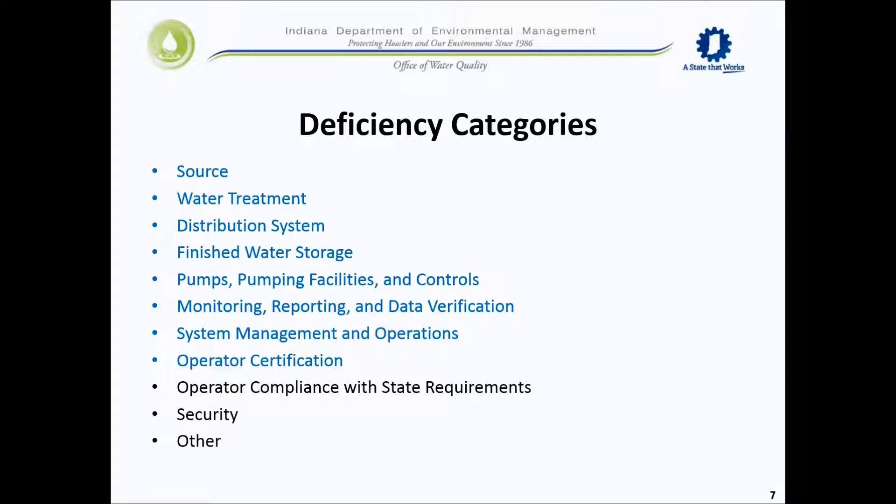So just a little bit of perspective. We are tracking deficiencies—I apologize, these numbers are outdated, I didn't have the right ones here, but these are from April. We keep track of these to help water systems complete upgrades or fix deficiencies. For minor deficiencies, we're up to about 905 across each survey category. For significant deficiencies, we're up to 153 that we're tracking, and we'll be following up with water systems to make sure they correct them.

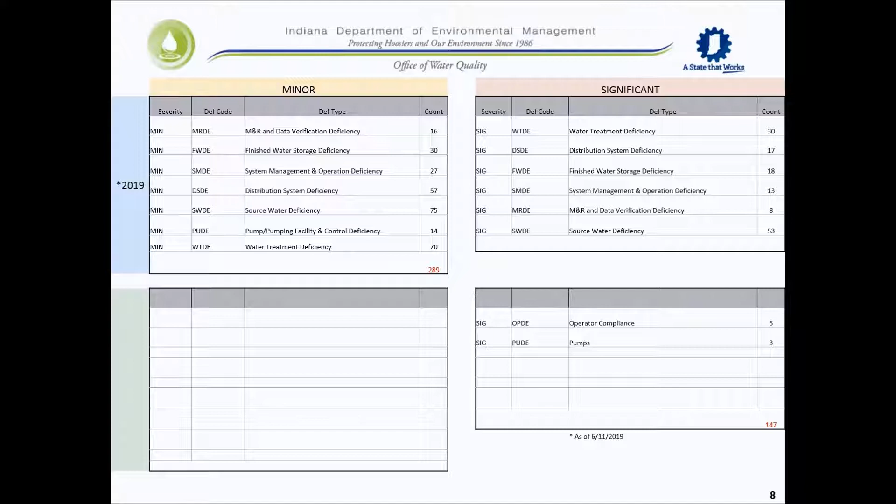Basically, as a field inspector, you're visiting a facility and making contact with the operator, and as you walk up to the well house or pumping facility, you're striking a conversation and developing that rapport. In Indiana, we make appointments to go visit them, but we can just show up if we want. Most of the time we're able to make appointments and meet with the right person, so we're getting the correct information.

In the process, walking up to the pumping facility, we're scoping it out, looking at the roof and different aspects of what we're looking at. We're looking for any problems that might be happening on the outside, any security issues. Once we open the door and look inside, we're surveying the area and beginning our source inspection, looking at each of the components of the pumping facility.

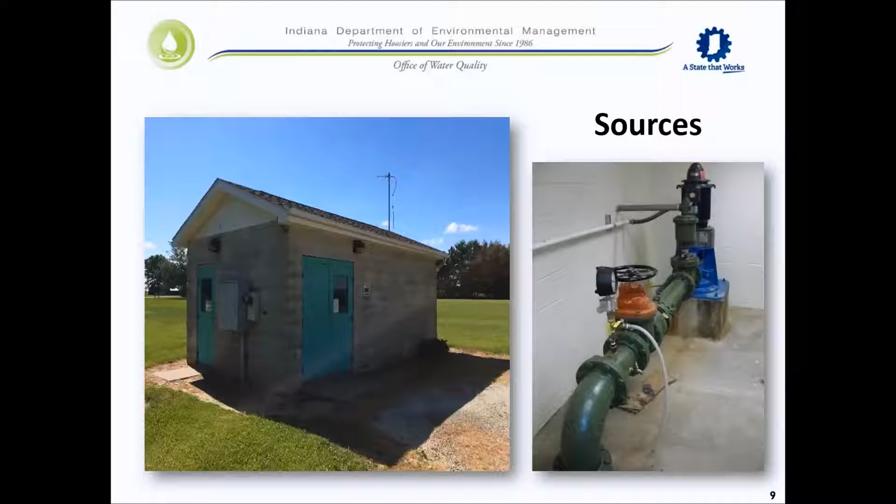This is a small municipal water system. At each of the facilities, we're discussing with the operator any issues they might have had with this well or any others, any of their source water aspects.

As an inspector, you're providing a second set of eyes. Maybe you see something obvious and point it out to the operator, and they realize, oh, I didn't know this was happening. You'd think, boy, this is obvious—you're leaking oil all over the place, how did you not know this? So that's a good opportunity to approach the operator and really drive home the point that you need to be looking at your infrastructure. You need to be visiting these facilities, especially if they're remote, because if you don't have good electronic surveillance, you don't know what's happening out there.

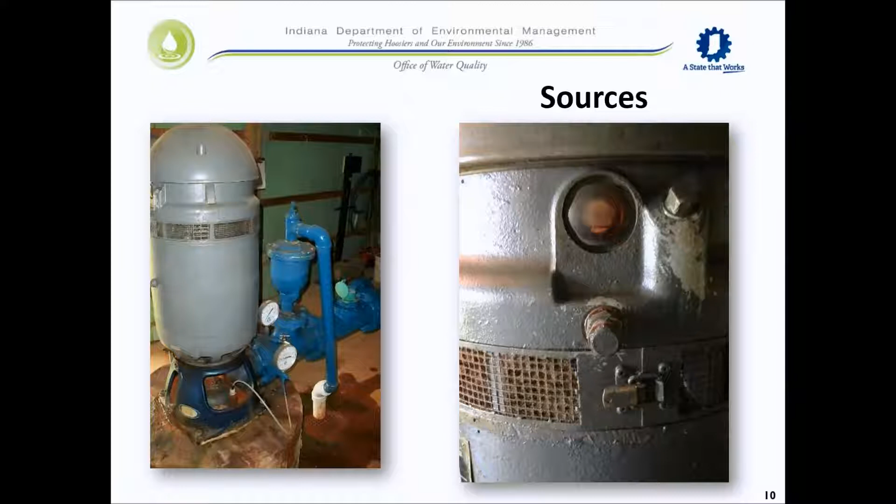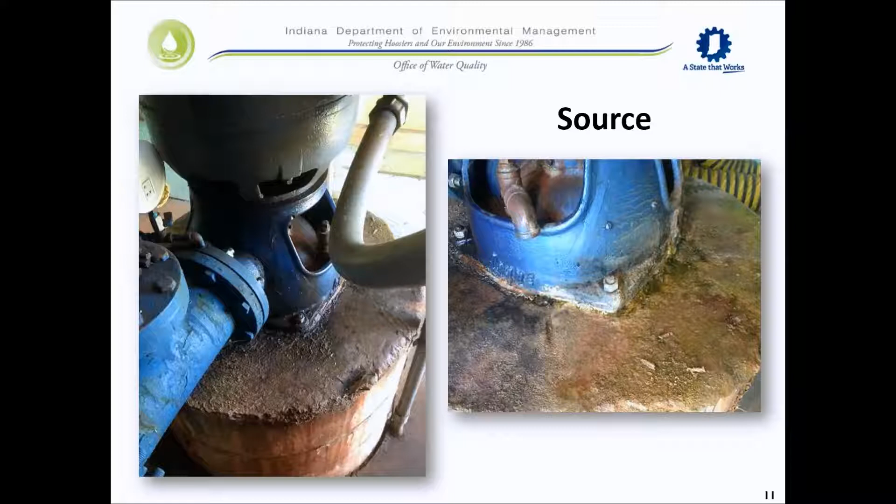So as an inspector, you're looking at these components. In this particular one, it looked like oil was leaking onto the pad, and actually the food-grade oil was getting into the well casing and being pumped into the aerator and clear well and through into the filters. That was a significant problem the operator didn't realize was happening, although there were gallons of oil in the pump house. We had a conversation about that. But you're looking at all the components in the system, making sure no obvious leaking or problems are occurring.

Now, we also visit a lot of small systems, and sometimes we come across some real obvious ones, but for the most part inspectors are looking at restaurants, schools, factories, churches, and so on. We come through and see a lot of these types of examples, and we're able to talk to the owners about potential problems they could encounter if this continues.

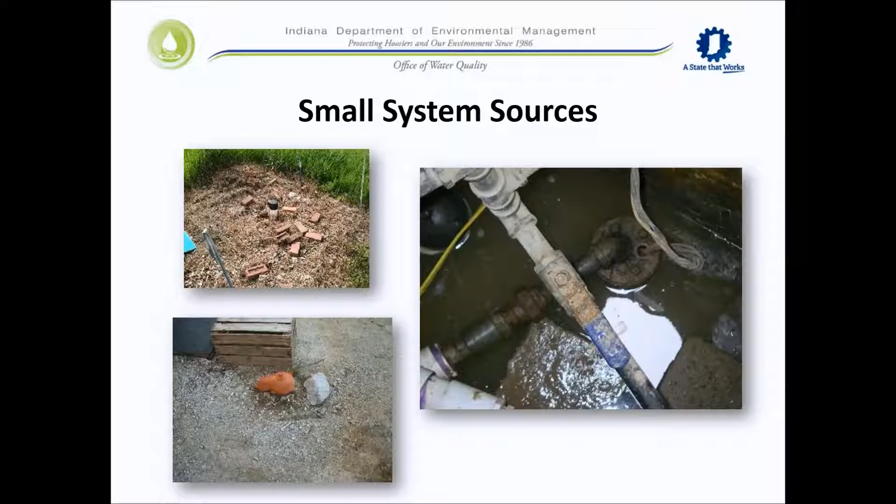So either you're using too much weed control around the well—you want to not do that—and there are some flooding concerns and potential problems with insects and so on entering the casing. But source water is very important for us to consider, being the first layer of defense: selecting a good site and protecting that water source.

Just a couple of other examples here with physical damage in parking lots and so on, or pooling water around the well, and maybe some outdated equipment—that well cap there could potentially be upgraded to something that would allow for better sealing around the well.

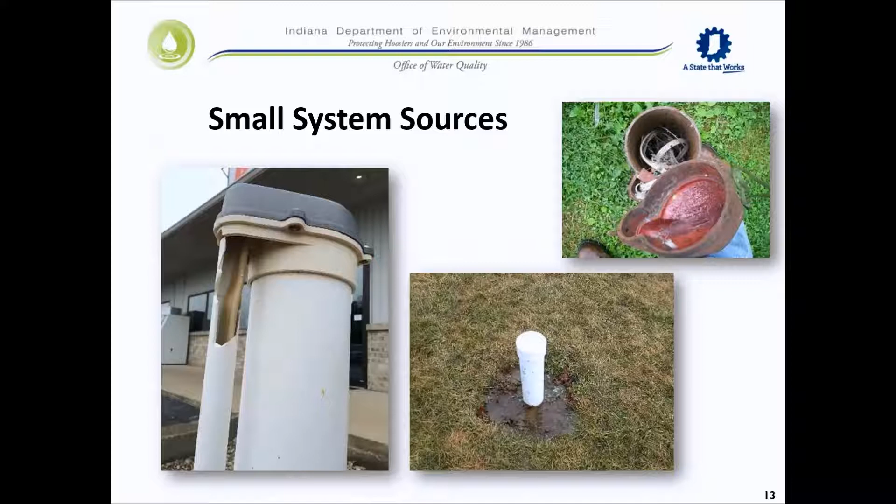Moving on to water treatment facilities—there are all types of sizes, shapes, and varieties. As an inspector you have to be aware that it may take a long time to see everything, but a lot of things are common, and you need to take note. So we're looking at the facility, what does it look like? Again, walking around the building, surveying the site, looking at auxiliary power, and talking to the operator about how they operate that.

One operator said, 'Oh yeah, we got a new generator,' and I asked, so are the wells connected? 'Oh no, it powers the plant.' 'Okay, so how are you going to provide water to the system?' 'Oh, we forgot about the well.' So that's not helpful—it just shows the value of another set of eyes, or someone else asking some questions.

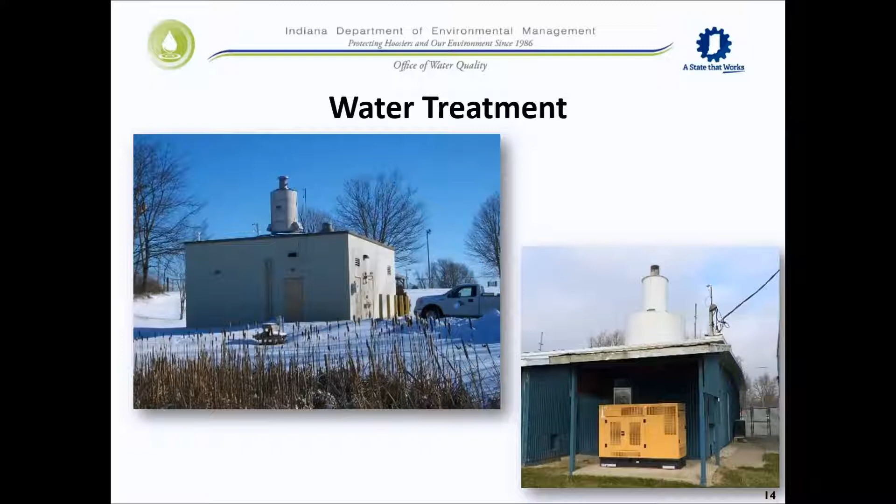Now you can walk into the treatment plant, and you're talking to the operator: explain to me what's happening here. Not that you don't know what's happening, but it may be your first time, or you're not familiar with something, but you want to let them know that you're looking at each component, and the operator generally will be very proud of the work that they do at the plant. So they will be quick to give you a tour and talk about the great things that they have done and what they do there.

So you, as the inspector and the regulator, are looking at each of the components, taking your notes and taking your pictures, and looking for potential issues that might exist, with an idea of potential pathways of contamination into the water system. So you're surveying filter discharges. Are they meeting basic standards with air gaps and cross connections and so on? The feed equipment and liquid, and you talk to the operator about spill management and control and safety data sheets, and you're looking for any issues with the tanks, and just really being critical about what is going on there.

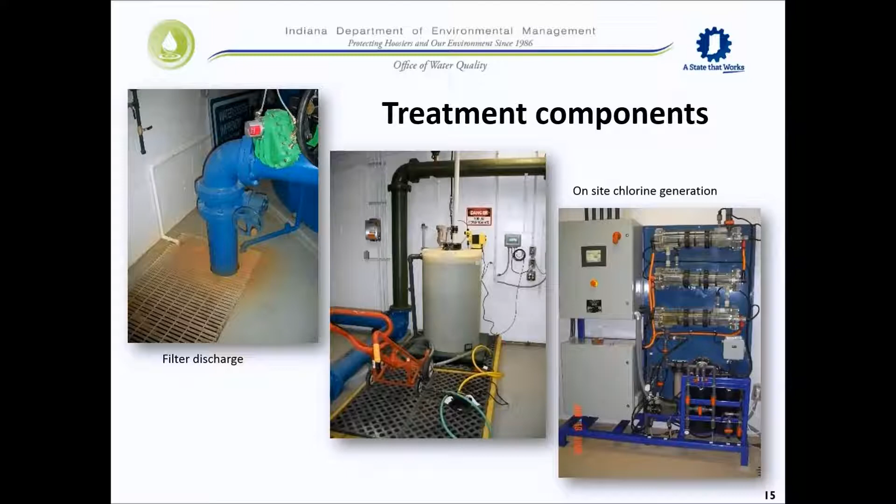And this one on the right is a facility where they make sodium hypochlorite on site. So you talk about that: what kind of maintenance does that take? How often is that down? Do you have to take that apart ever? And so you find out if they are actually doing all the maintenance.

Depending on the water system and the facility and the treatment that they have there, in this case, we have some pressure filters, horizontal systems here. And you want to walk around all of the filters. You're noticing the cells and maybe pipe colors, and you talk to the operator on how does it work and how often, and you're just really quizzing the operator, one, to make sure that they are aware, but also you're talking and conversing and developing a working relationship.

So now these particular vessels will have air relief valves. You want to check the discharge, make sure that those are screened and have air gaps on them as well. So they should have rows and rows of screens around because everything will need a screen.

On the right side there, we have some high service pumps, and you want to look at each pump and talk to the operator. You know, when do you take these offline, and do you maintain them, or do you just wait until they break down to fix things? So is there an operation and maintenance process that they go through and that they're watching to prevent breakdowns, so that the water is flowing at all times?

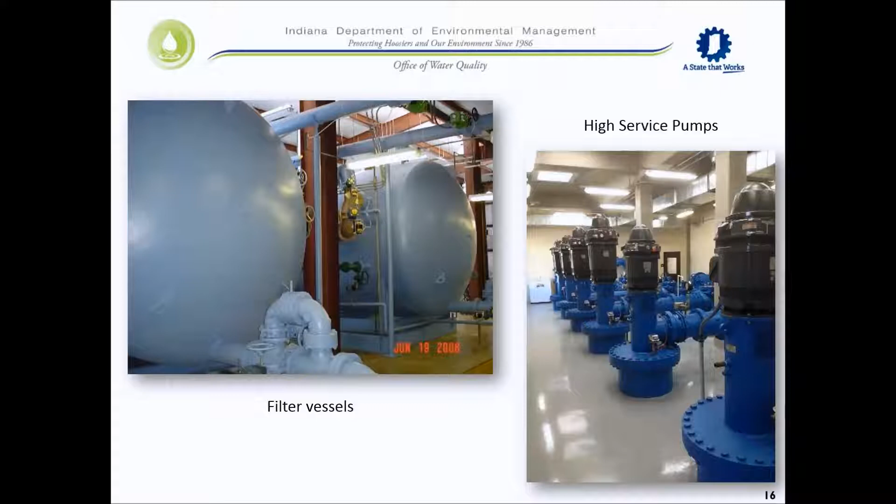Now, a very important room in the water plant, of course, is a chlorine room, where there is quite obviously a gas hazard in this case. But you also want to look at all the chemicals and how they handle the chemicals, and are they separated appropriately, or are they together? You know, where are they stored, and what kind of situation, whether it's dry chemicals and the bags and such.

So in this case, we have some issues here in the middle with the chain being off like that. As the EPA trainer said, you just back away and walk out of the room. That is quite a hazard there if that tank tips over for any reason. And that scale seems like it's seen its better days.

But you want to make sure that the venting is working before you enter the room. You can turn the lights on, verify the fans are going, and then you sort of survey the area around the outside of the chlorine room. You talk to the operator about some issues or tank changing procedures and things like that, just so that you can give it a little time to get that air exchange in the room. Make sure that tanks are properly secured on the wall, and any of the vents are facing down and screened.

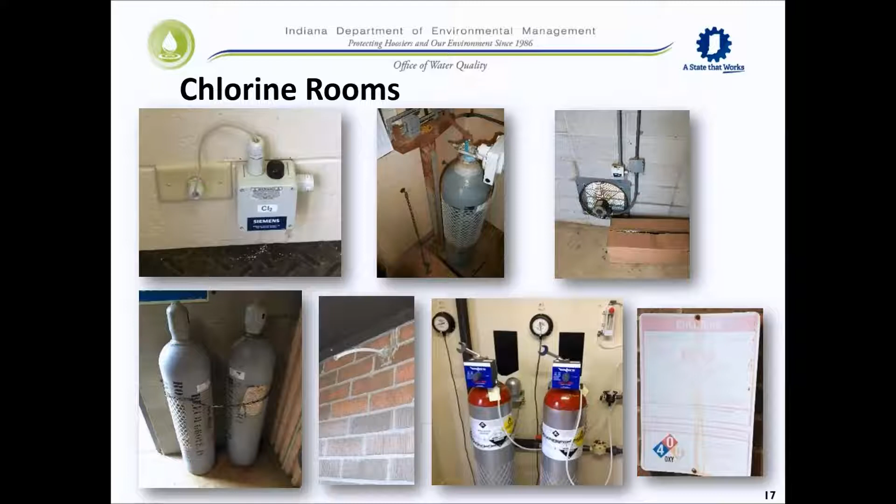Signage is important. It tells people if they're approaching the room that there is a potential danger inside. So all those things you want to talk to the operator about.

As you continue to tour the plant, you want to look at where they are sampling. In this particular location, they have several types of faucets where they can collect good samples throughout the process, all the way from the raw to the finished. And you can see in this groundwater plant the red tinge on the tubing is indicative of the raw water. And as it goes through the process, it's removed and it gets clear.

So you want to look at the equipment within the facility and the laboratory equipment, and make sure that they're calibrating the instruments and that the reagents are up to date. And if they are expired, that's a problem. And then you just talk to the operator about the sampling. Where are they sampling? Is it a state-approved location? And all those types of things.

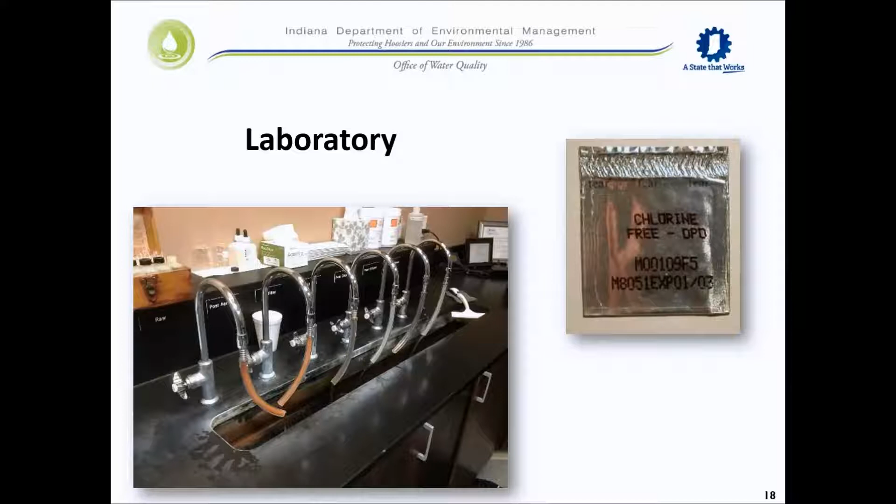Now, around a treatment plant, there are other aspects of things. There may be some abandoned wells. We want to verify that those are no longer a potential problem to the aquifer. So I want to make sure that those are capped and abandoned properly.

They may sell water to other facilities or to pool contractors or construction contractors. So I want to make sure that they have proper equipment. You want to meter the water so that they can account for it. And also, you want to make sure that they have a backflow preventer that is tested and working properly so that they don't pose a potential cross-connection hazard at the water plant.

A lot of systems now, even smaller systems, are able to provide some sort of electronic surveillance or a SCADA system, and that tells them what's happening throughout their plant. And these are very, very beneficial for them to know what's happening, and they have a lot of control, and they can set up alarms, and it's really useful. They can get into it remotely if they need to from home and so on.

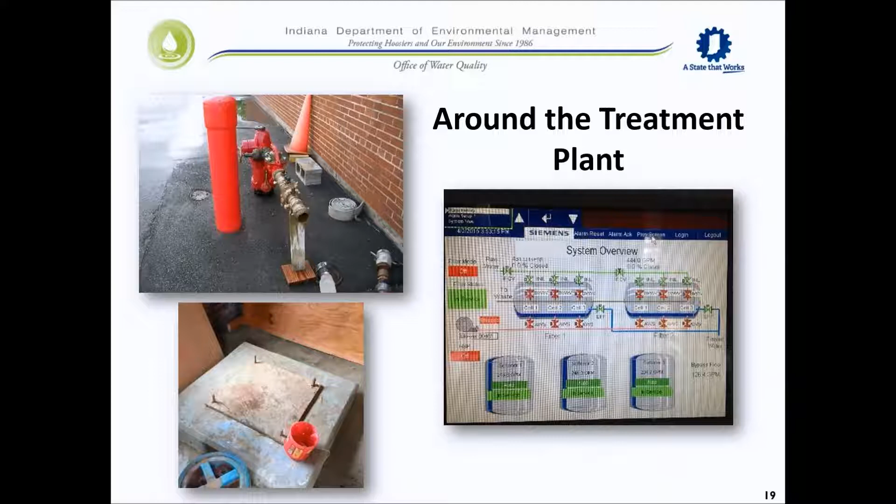But you also want to talk to them about security and cybersecurity, and make sure that they have appropriate safeguards in place to prevent any hacking or electronic problems, so that they don't lose control of their water plant.

In some small water systems, the treatment that we may encounter may be as simple as a water softener or an inline filter, and so you want to talk to them about the potential hazards that can occur if they don't operate those treatment devices appropriately. Here we have, of course, the softener allowed to regenerate without any salt. And you can see some insects in there. So that could be a problem that could introduce potential bacteria into the water system when you regenerate without any salt.

The filter is pretty well full of iron in this case, and they're lucky if they're getting any water running through there, but you want to talk to them about maintenance and replacement of these filters to make sure there's good control of the iron or sediment, but also that it's not harboring any bacteria when they're this dirty.

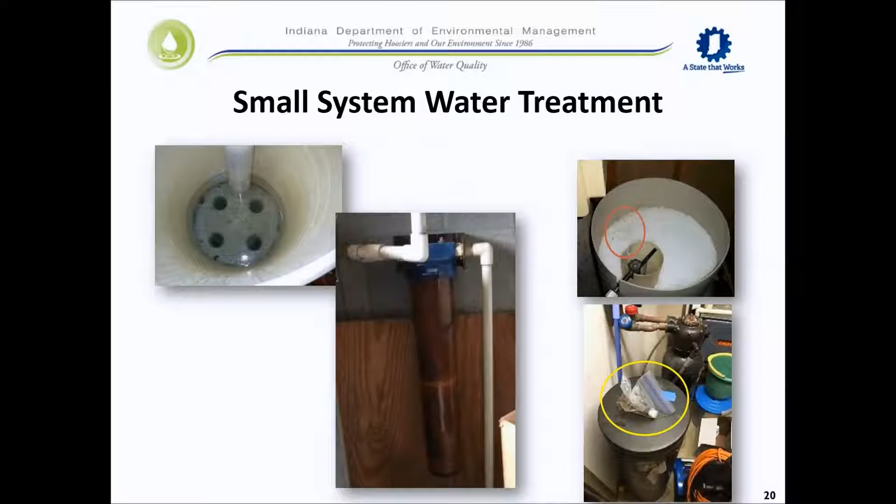This softener tank has salt, but it also has mouse droppings. So you want to look into the salt tank and make sure that you don't have any extra things in there that could be a problem. On the bottom right, we have some pictures of this furnace room where the softener is located. It's also used as storage, and they have these Ziploc bags with ant killer and poison on them. So that's a clear indication that they really don't understand what that room's about and what that salt tank does, and so on. So there's a lot of education that has to go on by an inspector at a facility when they're on site.

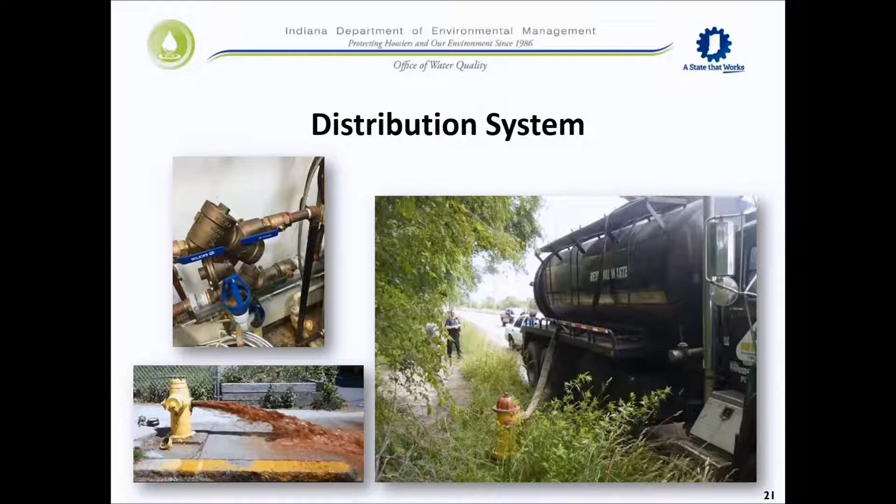Operators should be looking at flushing their systems appropriately to make sure they don't have areas in the distribution system where you have so much sediment, and if you never flush and then you flush, you might get this sort of water. But if you employ an appropriate flushing program, then overall, I think water quality is increased, and there's lots of studies that would support that.

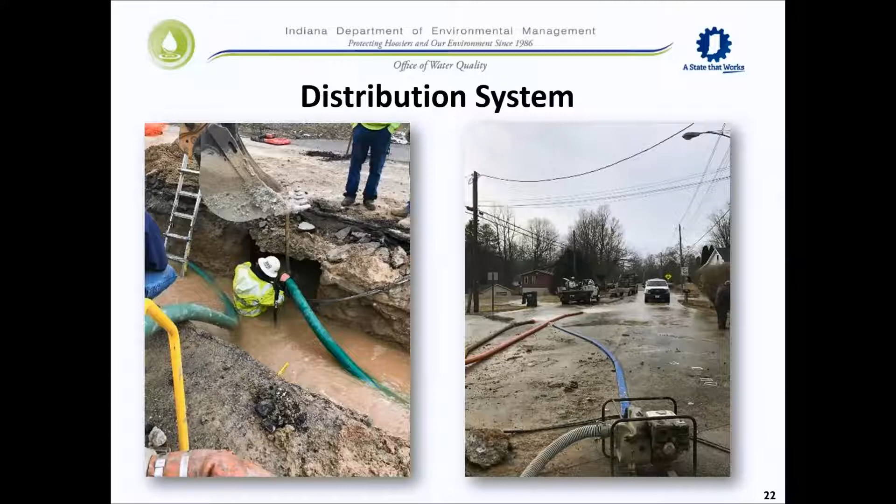Aging infrastructure, of course, is always an issue, and in this town, unfortunately, is no different. Major blowout at an intersection, and a major headache for these guys. But small systems have a distribution system just the same, a lot smaller, of course, but a lot of the same issues can arise. It can have a potential of cross connections or systems that, if inappropriately connected, could contribute to water quality problems and risks that can come from it.

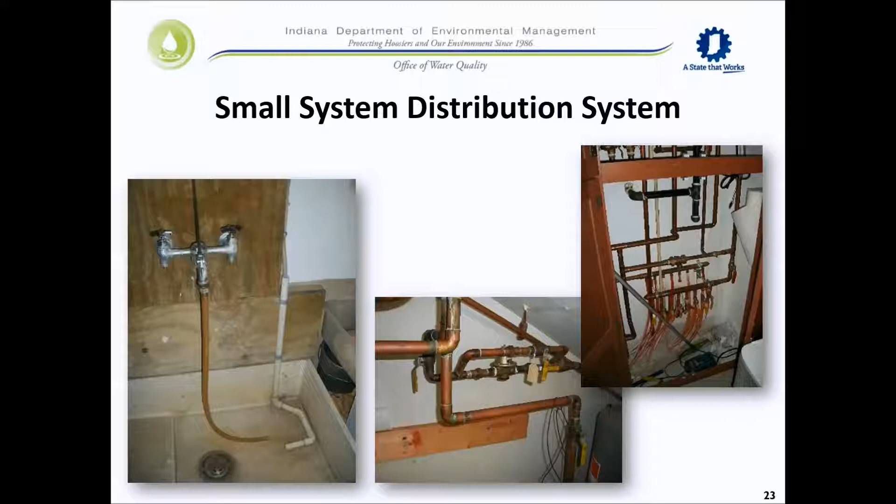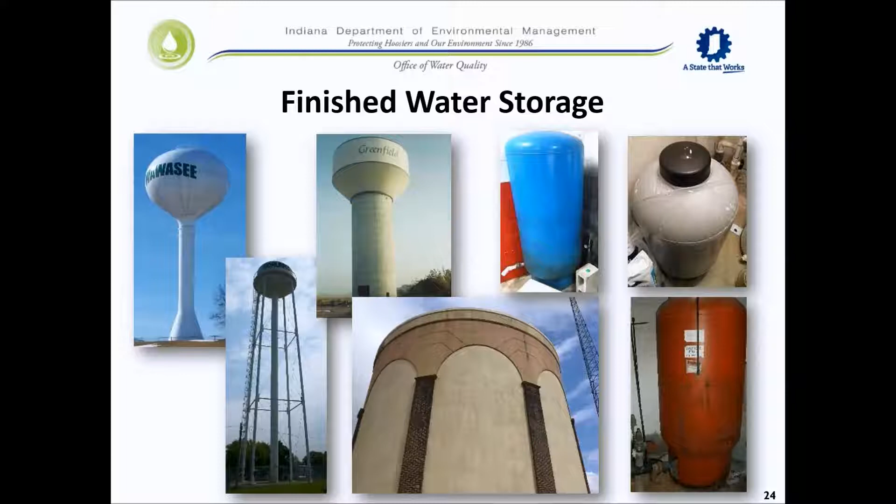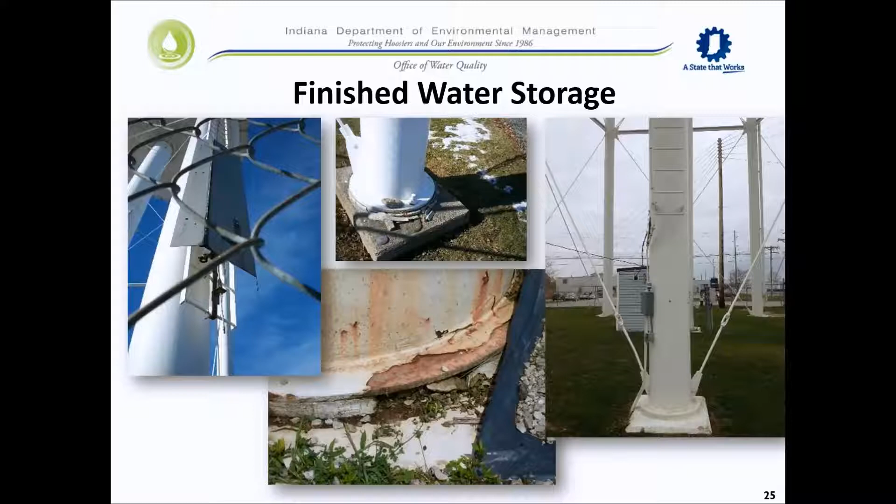A lot of issues. Water towers often are neglected because it's an expensive proposition on top of everything else. So do you have safeguards in place, is it locked to prevent anybody from climbing? The feet and the concrete pads, are they in good shape, or has weather been an issue that they need to address? All these things are opportunities for you to discuss with the operator, who many times will say, we just don't have the money. The board just doesn't want to give us the money. And so we can use the inspection report at the end to provide a tool for the operator to try to convince the board or the town president that we need to inspect our towers and provide some repairs.

Finished water storage screens and overflows are notorious for allowing potential hazards to enter the tank, because if the screens are damaged or removed or blown out, then it's a direct path from the ground up into the tank. So we recommend that systems install 24 mesh and also 4 mesh for structural support, and that they check these screens often. The fact that they had the screens last year or the last time you inspected them doesn't mean that the screens will be there now. We also want to look at the grading around the tank to make sure that water isn't allowed to pool around the structure, because over time with weather you could have some issues there.

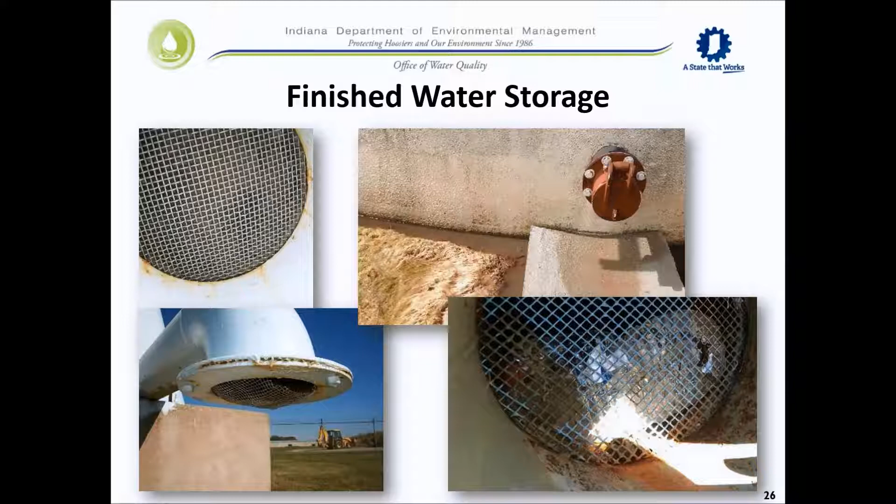And in this bottom right screen, there's a water bottle and some other debris that was allowed to enter the tank; possibly contractors were working in the tank and left it behind, or it got thrown in there some other way. But potential problems can always arise. So screens are important. We can have animals entering the tank for one reason or another, and the tops of the tanks are particularly difficult for people that don't climb the tanks.

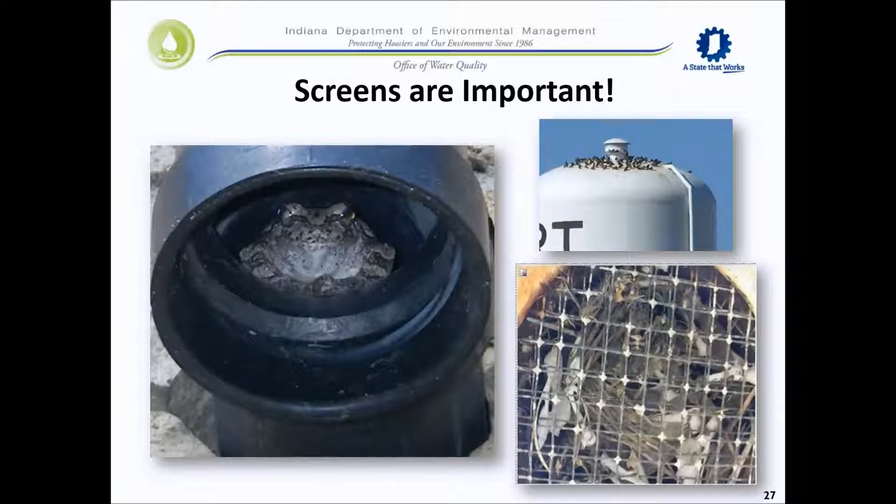In Indiana, inspectors are not allowed to climb the tanks, so we have to rely on the operator and the municipal system to inspect the tanks often and verify that screens are in place to prevent any issues from arising or birds entering the system. In the bottom right there are some feathers and other things that came out of the overflow. Maintenance is important. Water towers are an important component of the water system, and if left unchecked, it can be a catastrophe, with the municipal system losing its ability to control pressure and have fire protection, among other reasons.

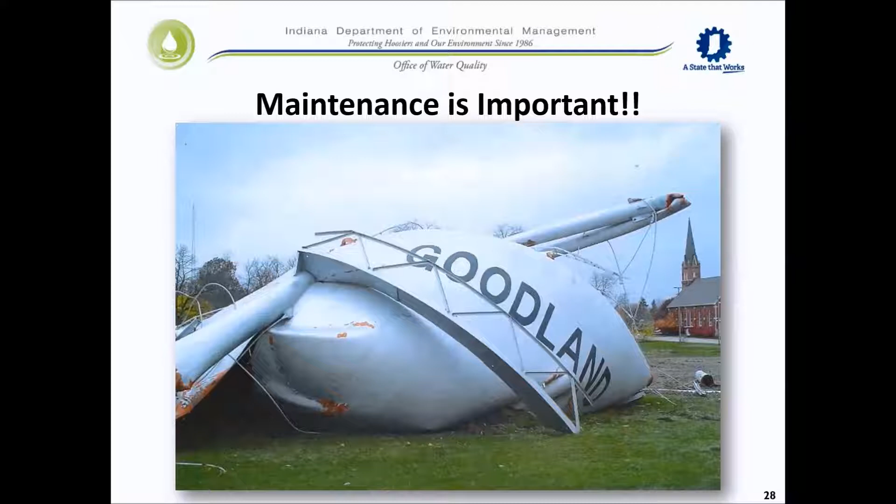In small systems, storage tanks play an important role as well because they provide pressure in the system, and if they lose pressure, the same problems can occur. It can introduce bacteria and potential hazards. You can allow backflow and back siphonage to occur and cause serious problems, introducing bacteria and potential sickness. So we want to make sure that tanks are inspected and replaced appropriately, and inspectors are on the lookout for any of these problems.

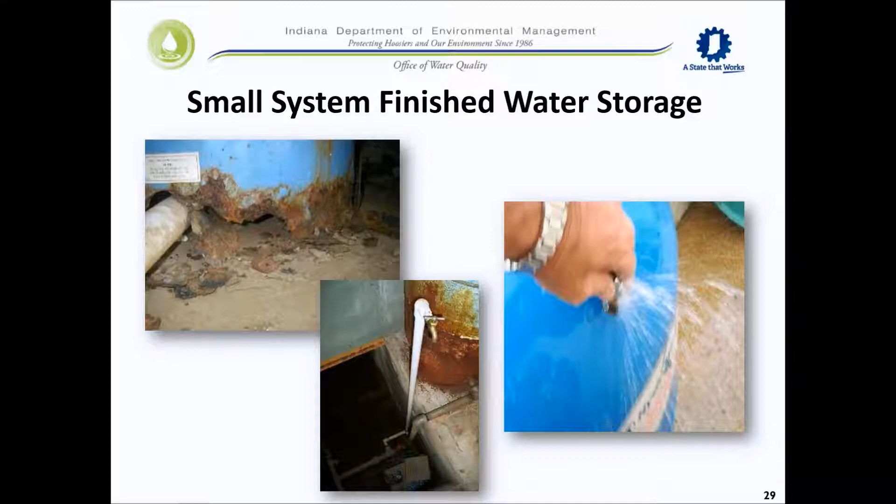Another component of the water system, of course, is pumping facilities with booster stations and booster facilities to provide for water supply farther into the system. So these are facilities that need to be inspected often as well. A lot of these are in remote locations. Inspectors are taking note of how many pumps and gallons per minute, how they are designed within the system, and what pump comes on in relation to demand.

So inspectors will walk around and check on these pumps a lot, similarly to the high service pumps. But we need to discuss this with the operator. And in Indiana, having a booster station makes it a more complex distribution system. So it does take additional certification and higher certification to have a system with a booster pump.

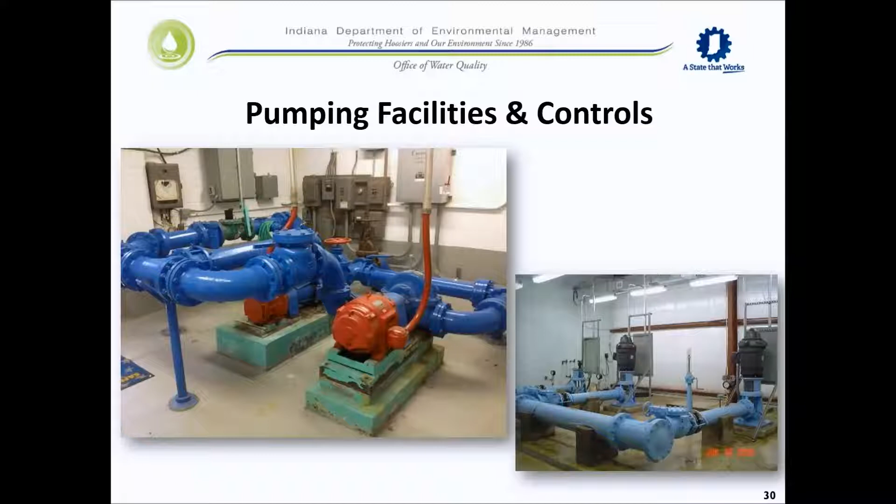A lot of what an operator goes through is the monitoring and reporting and that data where they're sampling, and the paperwork, right? A lot of operators like to be out in the system, in the holes, fixing things, but equally important is the time spent in the office, getting all that straight and provided to the regulating community and showing us that their water system is operating properly. So any sampling, monthly reports of operation, well logs, and so on.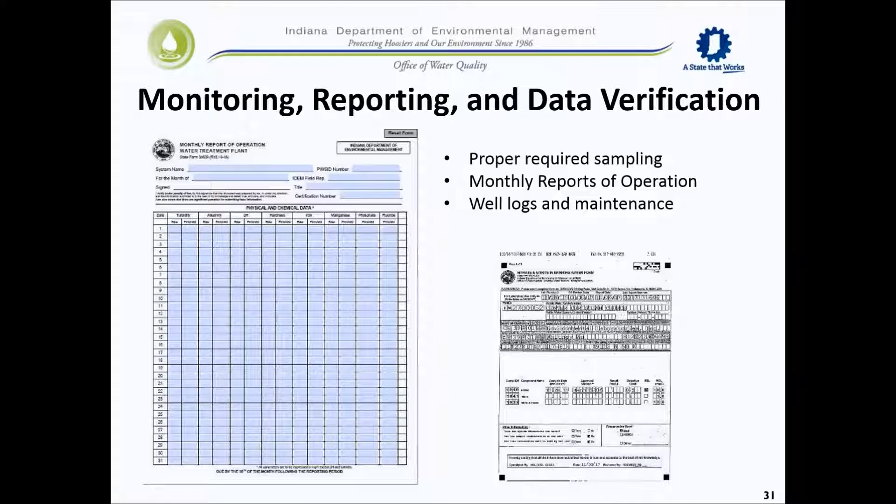So when you go on site and you walk up to the operator and they say, you know what, here's all my stuff, go at it. That's really good because they have what we need to look at. A lot of times we'll send an operator a checklist of things that we're going to be looking at and questions that we're going to be asking, because we don't want to spend too much time fiddling in files or trying to do some math on site. So we want to make sure that the operator is aware of what's happening and what's required of him.

So we're going to look at operation and maintenance and talk to them about how they operate and how they maintain their equipment. Do they have any records to show? Because memory is only good for so long, and then it all blends together. So do they have replacement parts and enough storage to be able to make repairs quickly? Flushing programs and backflow prevention ordinances and programs, site sampling plans. Inspectors in Indiana review those on site with the operator to make sure that they have adequate site sampling plans for the RTCR. We discussed all these issues with lead and copper and so on.

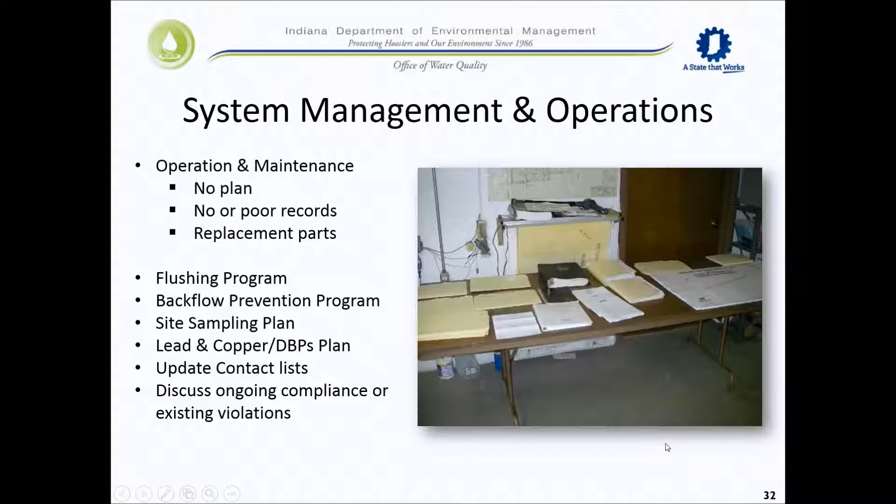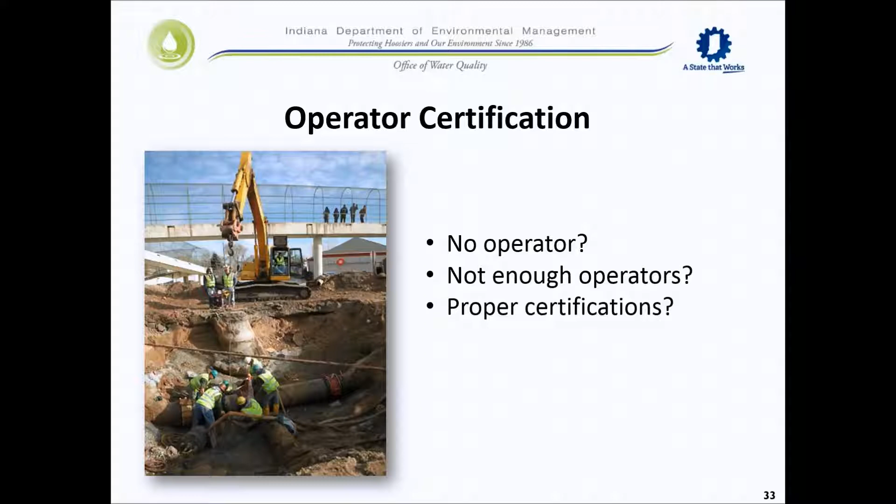We verify the operators are properly certified, or if the facility doesn't have an operator for one reason or another, they retired or they are no longer at the facility, that's an issue that we have to discuss with them and notify the town that they're now out of compliance. This month, in a few days, we're about to decertify several hundred operators who have failed to acquire their continuing hours. I shouldn't say decertify, but their certifications will expire. So we're talking about 500 or 600 operators in the state of Indiana whose licenses will be expired on the 30th. So that's a major problem that we're going to need to deal with in the next few months, trying to get these operators the proper hours and explain to them that it's important.

We discuss with the operators and systems emergency response plans and how they can handle emergencies. It's a little different than their wellhead protection plan emergency section, but how will they continue to operate or provide a continuous supply of water through an emergency? Auxiliary power, redundancies, and so on are great, but beyond that, do you have contracts with outside vendors or other utilities that you can call on to help with that process? How do you handle a spill within your wellhead protection area? Do you exercise that? Do you have tabletop exercises that you're a part of? And if you hear about it as an operator, you should participate in those, because it is a community-wide problem. If some catastrophe happens, water continuance is very important.

We touched a little on cybersecurity. That's an up and coming topic more and more these days, but a lot of these operators are old timers. They're not really good with computers. So that's something that they really need to take to heart and start looking into if they have some sort of computer-based system.

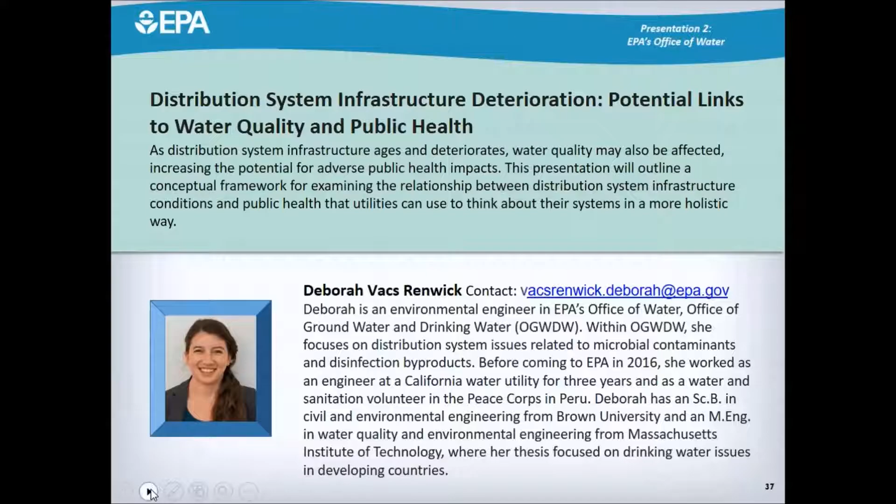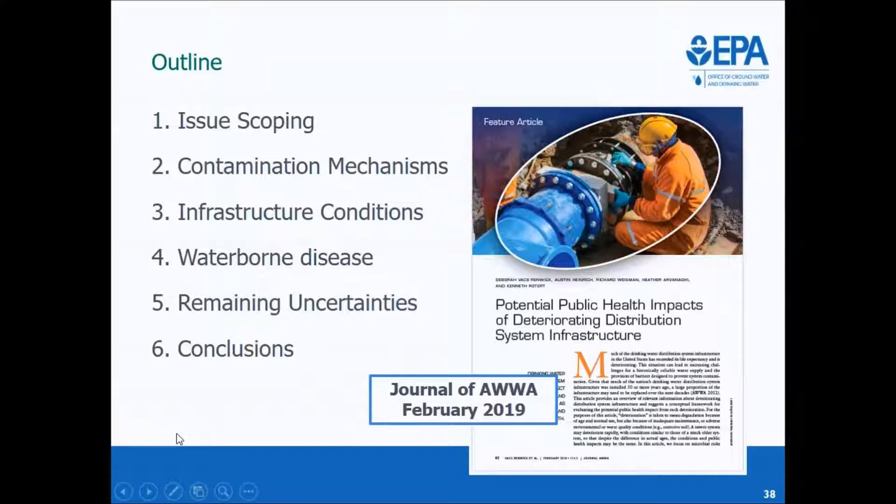Great, thank you very much. This presentation is going to focus on distribution system infrastructure and deterioration and how that can lead to public health issues. A lot of the information I'll be talking about can also be found in a journal article that my colleagues and I recently published in February in the Journal of American Water Works Association. So for the things I'm covering in these 30 minutes, if you're interested in learning more, I would point you to this article.

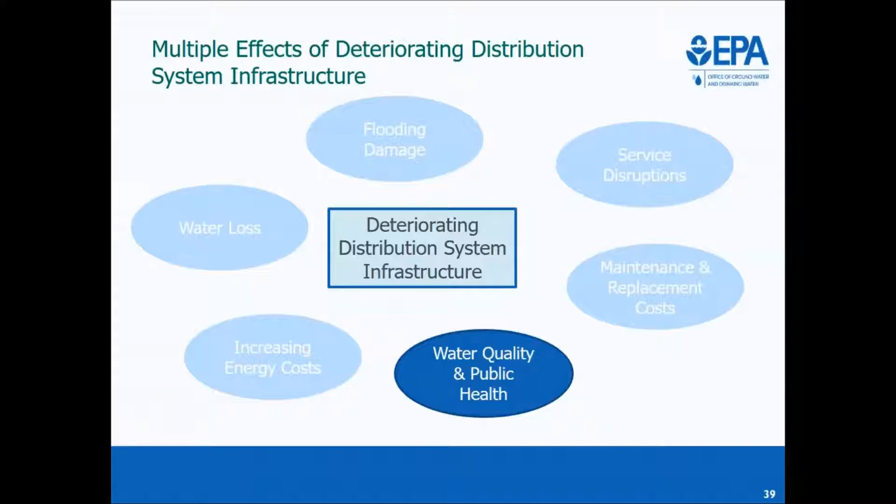So when we talk about deteriorating distribution system infrastructure, one thing I want to point out is that oftentimes deteriorating infrastructure and aging infrastructure get spoken about as if they're the same thing, but we want to make a distinction here. There could be infrastructure that is very old but very well maintained and so is not deteriorated, and on the flip side there could be infrastructure that is relatively new but has not been maintained well or has other issues and is deteriorated.

This slide shows that deteriorating distribution system infrastructure can affect a lot of different aspects of the water system. There can be service disruptions, increased maintenance costs, increasing energy costs, water loss, flooding damage. But for this presentation and this project, we focused on the water quality and public health effects.

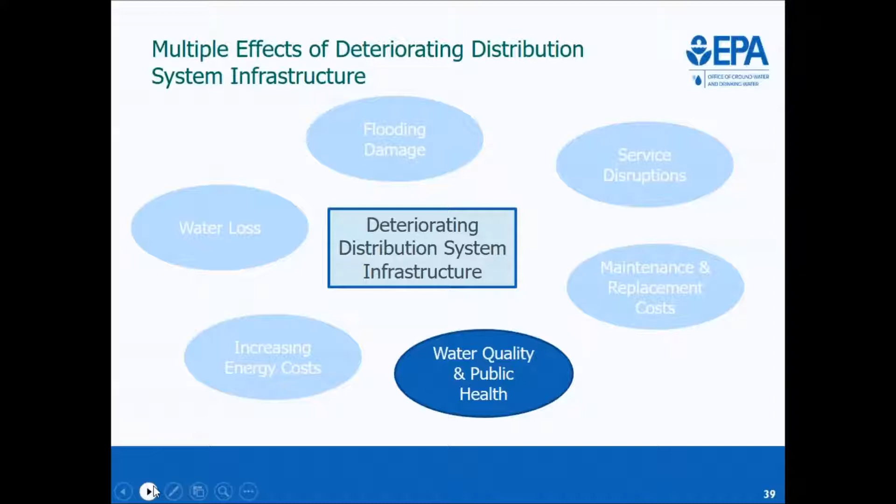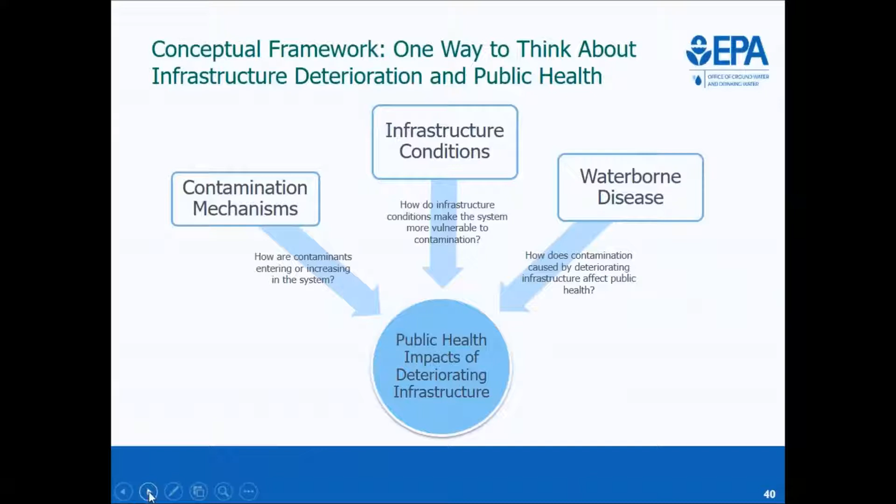To understand this problem better, my colleagues and I came up with a conceptual framework that breaks the issue into three pieces. First, the contamination mechanisms: how are contaminants entering or possibly increasing in the distribution system, and how does infrastructure deterioration affect those mechanisms? Second, the infrastructure conditions themselves: what types of deterioration make the system more vulnerable to contamination? Finally, waterborne disease: how does infrastructure deterioration affect contamination mechanisms and possibly lead to waterborne disease? That's the conceptual framework for the bigger project.

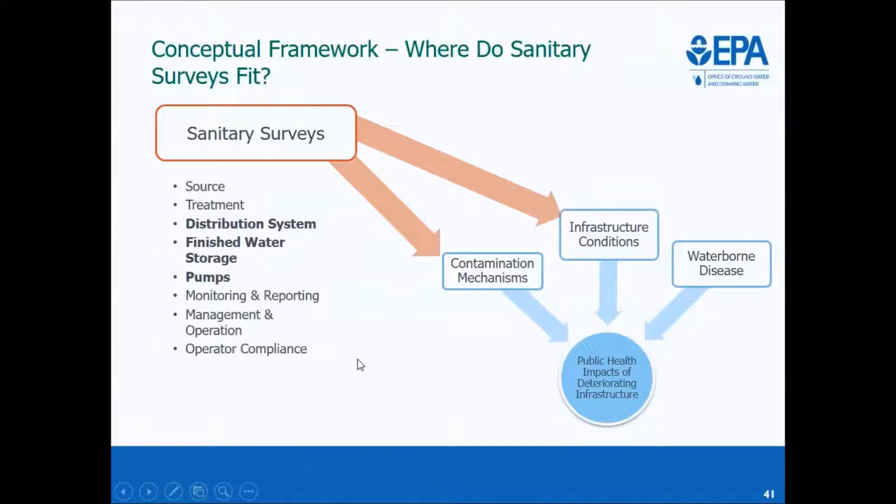For this presentation, we're talking about sanitary surveys. Sanitary surveys fit in as a way to identify the infrastructure conditions, like Lucio was talking about, but also to talk about how the system might be more vulnerable to different contamination mechanisms. These are the eight sanitary survey elements Lucio mentioned, and I'm focusing on the distribution system element, the finished water storage element, and the pumps element. The management and operation element is also important, as we'll see.

So first, what do we mean by contamination mechanisms? This is our way of saying, how do contaminants get into a distribution system, or how do they grow inside it? These are the ones we've identified as possibly most linked to distribution system infrastructure deterioration. We have intrusion, which is the most direct mechanism, where contaminants get into the distribution system from the outside, either through a hole in a finished water storage tank, or if there's a main break that coincides with a loss in pressure, contaminants could enter the system.

Next is biofilms and sediments. This is buildup of organic matter on the inside of the pipes or inside the tanks, and this is an issue in and of itself, but also these sediments and biofilms can harbor microbes that can affect water quality and also contribute to other forms of deterioration.

Next, corrosion. This is oxidation of any metal materials, so in pipes or tanks or other appurtenances, and this can lead to holes in the system, which can lead to more contamination. And then, as we're all familiar with, if you have a lead service line or other lead materials, the corrosion can cause lead to enter into the system.

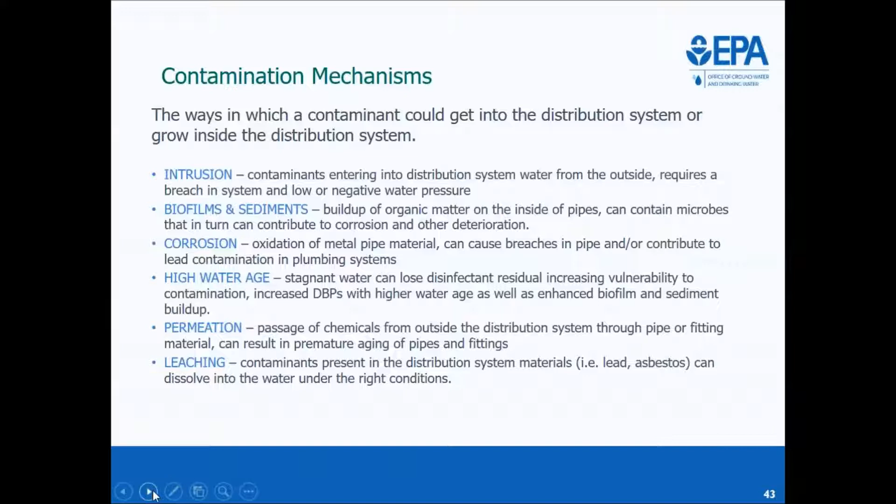If you have high water age, you may increase your biofilm and sediment growth. If you have lots of biofilm and sediment growth, you could host microbes that could actually increase your corrosion. The flip side also is that if you have corrosion, you may have some iron particles that are released that act as the food for the biofilms and sediments.

Another one - water age. As the water ages, it can lead to less dilution of leached contaminants. So if you have a pipe that is leaching material and the water is sitting for a long time, a higher concentration of that contaminant could build up. Both leaching and permeation could weaken the pipe itself, making a breach more likely, which could in turn lead to more intrusion.

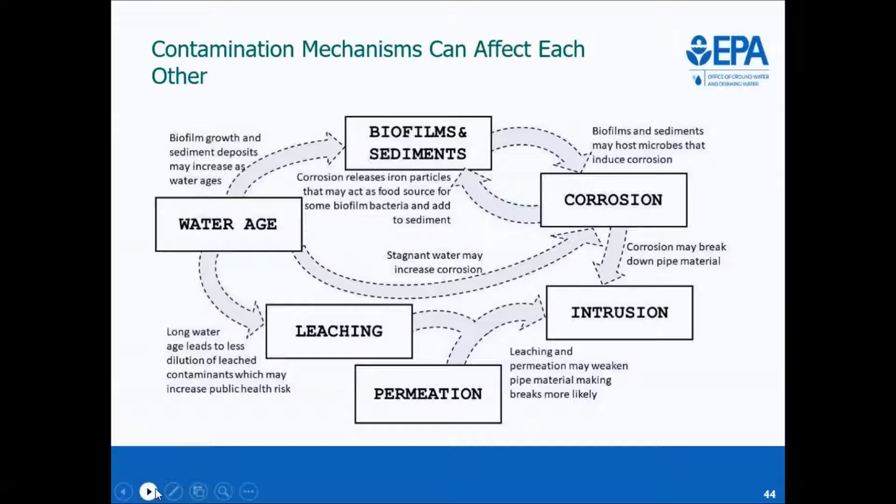So now we're going to go through the infrastructure conditions and how they relate to these different contamination mechanisms. One question we were trying to answer with this project is how do the different distribution system components deteriorate? What's happening to a pipe as it deteriorates will be different than what happens to a pump or to a storage tank. And then also, how does the deterioration influence the different contamination mechanisms, and vice versa, how do the contamination mechanisms influence the infrastructure deterioration?

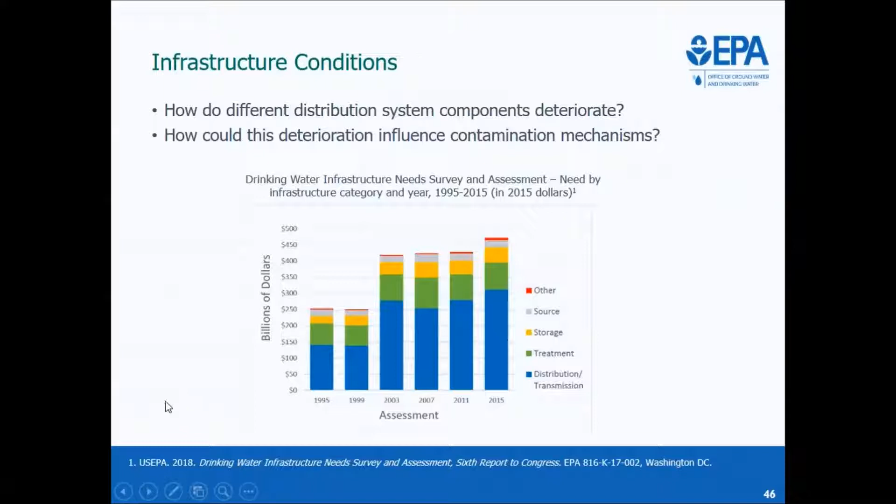For this study, we've divided up infrastructure in the distribution system into 4 main categories: pipes, valves, storage tanks, and then pumps and other appurtenances. And that's where we're throwing in meters, fire hydrants, other regulating stations, possibly, things like that.

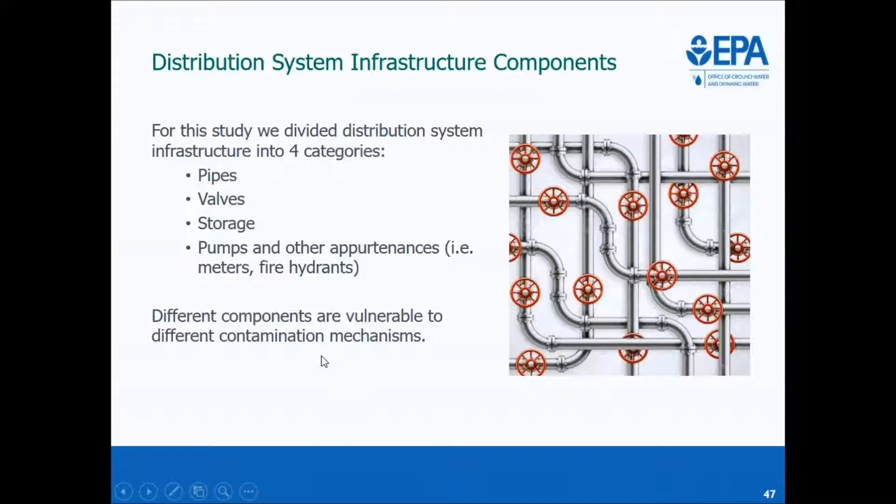We found that the different components are vulnerable to different contamination mechanisms, as you would expect. Starting out with pipes, these are by far the largest part of a distribution system in terms of miles and just the amount of material that you have. It's mostly pipes. It's estimated that there's more than 1 million miles of drinking water distribution system piping in the US.

Depending on what kind of pipe it is and what kind of environment it's placed in, the useful life can range from 50 years to 135 years. Different studies have found that older pipes are more susceptible to biofilms and also to corrosion-related failures. Over time, as pipes are used, they become fatigued, and this leads to more pipe failures, which means main breaks.

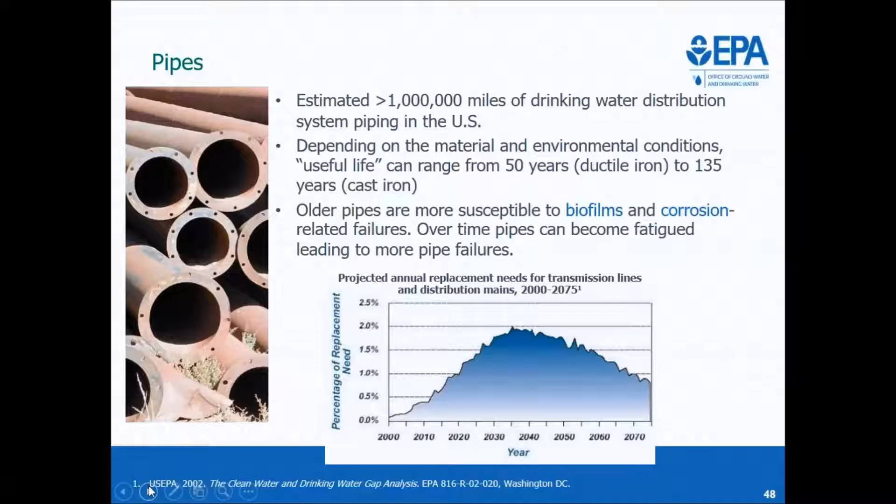There was a survey of almost 200 North American utilities that found that when a main failed, the average age was 47 years. That's indicating that as your main gets older, as your pipes get older, your pipe breaks might be even more likely.

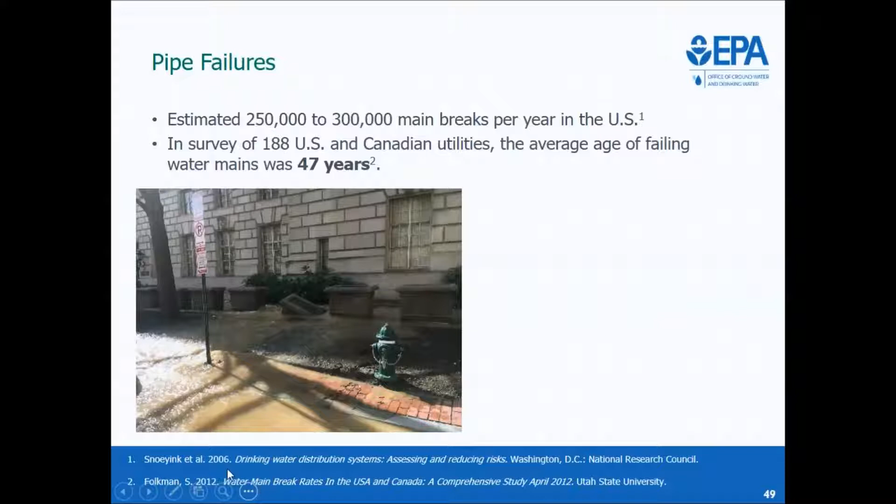One reason we care about main breaks in particular is that this can be a factor leading to intrusion. Obviously when the main breaks, there is a hole in the main, and as you are repairing it, there could be a possibility for contamination. But also there could be low pressure caused in other parts of the distribution system nearby, so that any small holes, maybe small leaks that have gone undetected, once the pressure goes down, contaminants could be entering into the system.

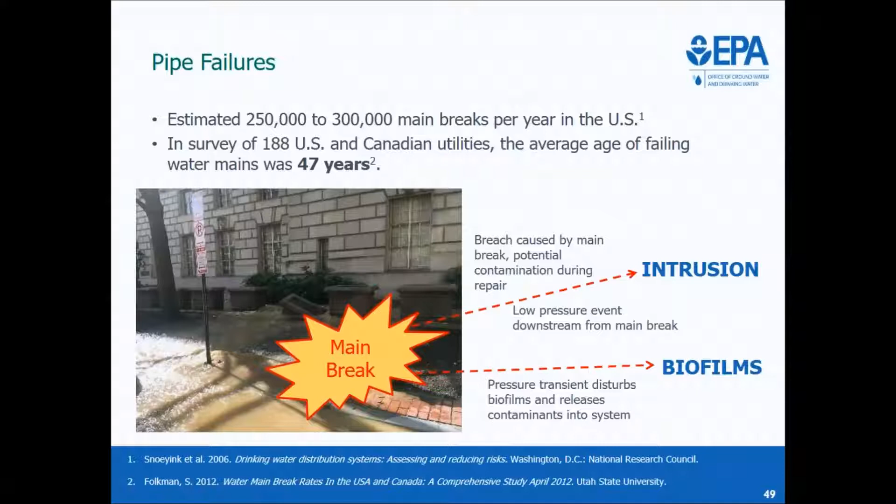The other issue that comes up with main breaks is biofilm. When the main breaks, there's usually a big flow increase or flow direction reversal in the pipes, and that can disturb the biofilms that have grown up on the inside of the pipes and could possibly release contaminants into the system. This is related to what was talked about earlier, that a good flushing program is something that can help contain this kind of problem.

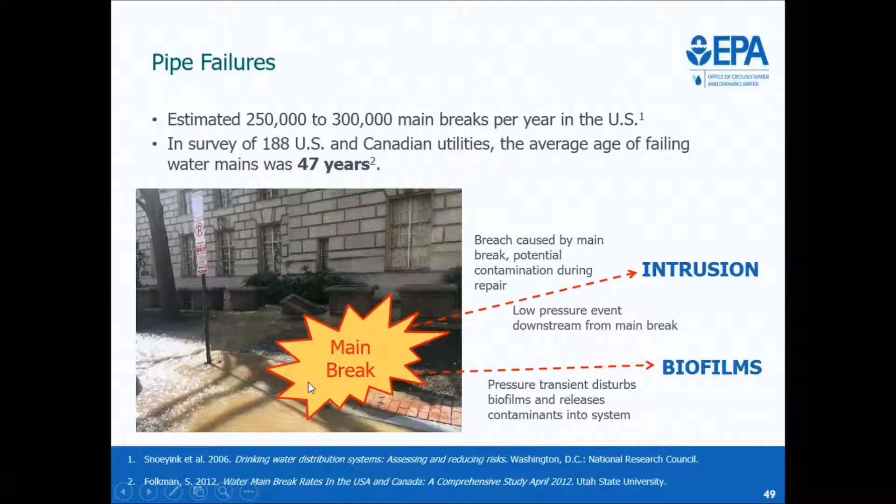Another issue particular to valves is that if they're not operated regularly, they can become stuck open or stuck closed, which can create dead zones or high water age areas, leading to further water quality issues. In one survey from 2002, 64% of utilities reported operating at least some of their distribution system valves as part of an exercising program. However, less than half of the large valves and only about a third of the small valves were reported as being operated each year. This is an operations and maintenance program that can help prevent some of the issues we see with stuck valves.

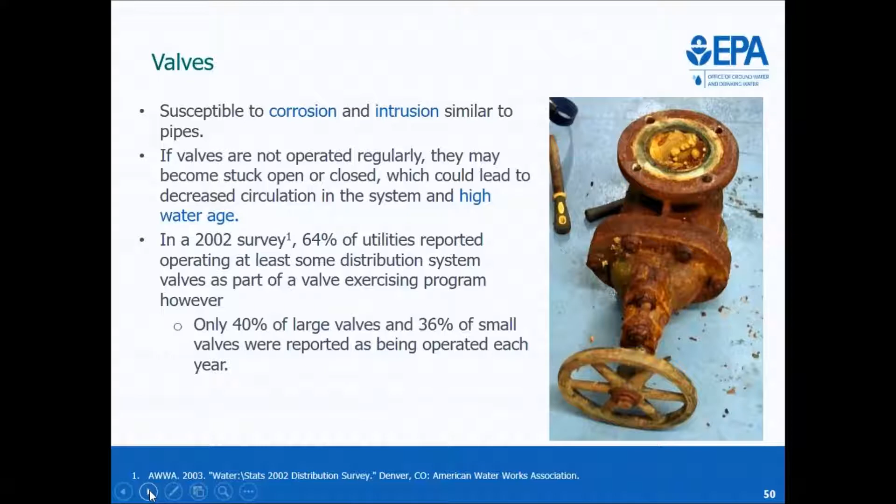They're an area where water is not flowing as quickly as in the pipes, so you can have high water age issues. There also could be issues with biofilms building up on the inside of the tanks or the bottom of the tanks. And particular to tanks is the issue that they're generally not pressurized. If there is a hole in the top of the tank, anything can get in. There doesn't need to be a drop in pressure to allow contaminants to enter.

There have been two very well-known waterborne disease outbreaks that were ultimately traced back to storage facility contamination: one in Gideon, Missouri in 1993, and another in Alamosa, Colorado in 2008. In both cases, the contaminant identified was salmonella, and many people got sick, and several people died as a result. I'll point out that these two systems both were unchlorinated, which was definitely a factor in allowing the contaminant to spread, but the contaminant entered the systems through the storage tanks.

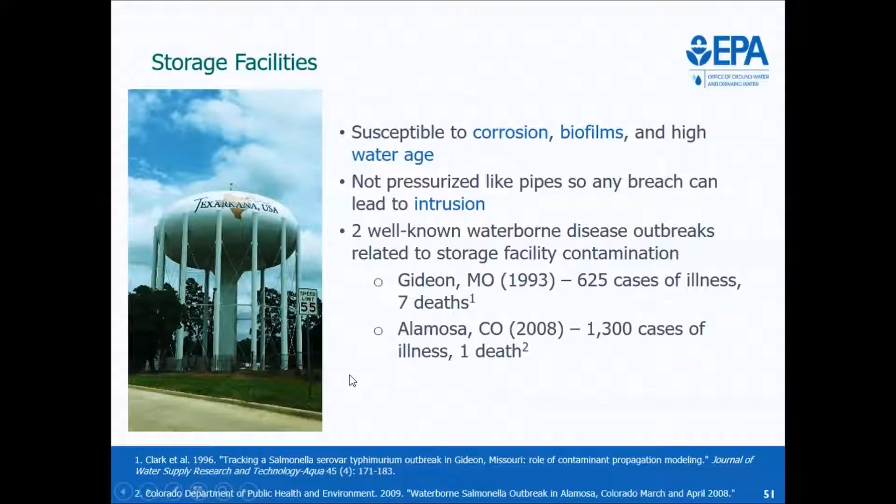Finally, pumps and other appurtenances. Pumps have a unique issue in that if they break down, that can lead to loss of pressure in the system. And if the system is depressurized, instead of water flowing out of small holes in pipes, it's possible that outside groundwater, rainwater, or other things can flow in. One study observed several different water utilities and saw 15 transient pressure events, just while observing, that resulted in negative pressure - not just low pressure, but negative pressure. A lot of these were caused by sudden pump shutdowns.

This is something that in the sanitary survey, if you have backup generators and a system in place to prevent pump shutdowns, this can help prevent these kinds of issues. Another thing - meter boxes can be another entry point for intrusion, especially because if they're below grade on the sidewalk, they can fill with water. Any drop in pressure, or if the water is high enough above the meter box, can lead all of that runoff to enter into the meter. Again, as with everything, anything that's metal could be vulnerable to corrosion, which could lead to breaches, which could lead to all of these other issues we're discussing.

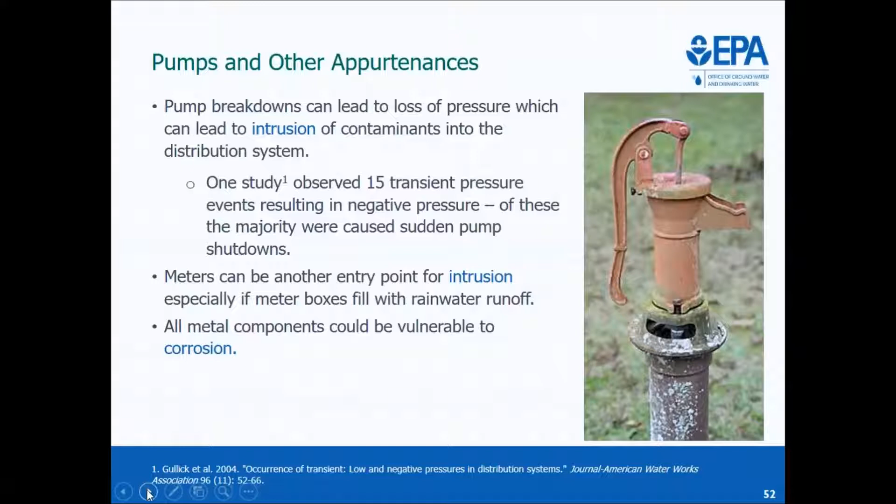Finally, waterborne disease and deteriorating infrastructure - this was the final part of the conceptual framework. How do all of these things, the infrastructure deterioration and the vulnerability to contamination mechanisms, lead to waterborne disease and public health concerns? This was one of the areas in the project that was the most complex and most difficult to quantify on a national scale.

A big one is cross connections - making sure you don't have pipes connected to other pipes where non-potable water can flow through. Another was water main breaks, and this is separate from water main repair, which is interesting. There could be contamination occurring with the break itself, but then also when you're trying to fix the break, you have to be sure you're not allowing contaminants to enter the system through that process.

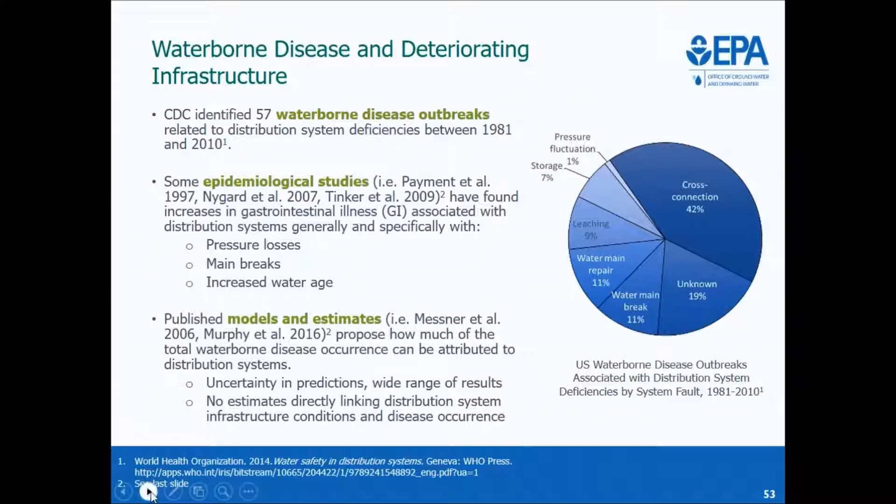So there's a lot of remaining uncertainties in the connection between contamination mechanisms, infrastructure conditions, and waterborne disease. Just to give you some examples of the kind of things that we're still trying to research and get a better idea of: for infrastructure conditions, there's a need for more data on the current infrastructure conditions. We have data from sanitary surveys, but that, as Lucio talked about, looks at deficiencies specifically. So there might be systems that are in poor condition but don't quite make it to the level of a deficiency.

Another thing that we don't have a lot of data on is how do the different maintenance practices affect the rate of system deterioration? Those systems that are very old but in very good condition, what are they doing on a national level? How can we compare between these systems? What are those well-maintained systems doing that are keeping their infrastructure in good condition?

For contamination mechanisms, all of these mechanisms that we've talked about could occur under the right conditions, but we don't really know how often they're occurring, especially on a national level. And when they do occur, how severely are they impacting water quality? Because there could be cases where water from the outside is entering the distribution system, but it doesn't contain contaminants at a level to cause any waterborne disease. So with a deteriorated pipe, what's the likelihood that you would have intrusion? If you have intrusion, what's the likelihood that you would have contaminants entering? If you have contaminants entering, what's the likelihood that you will have people getting sick?

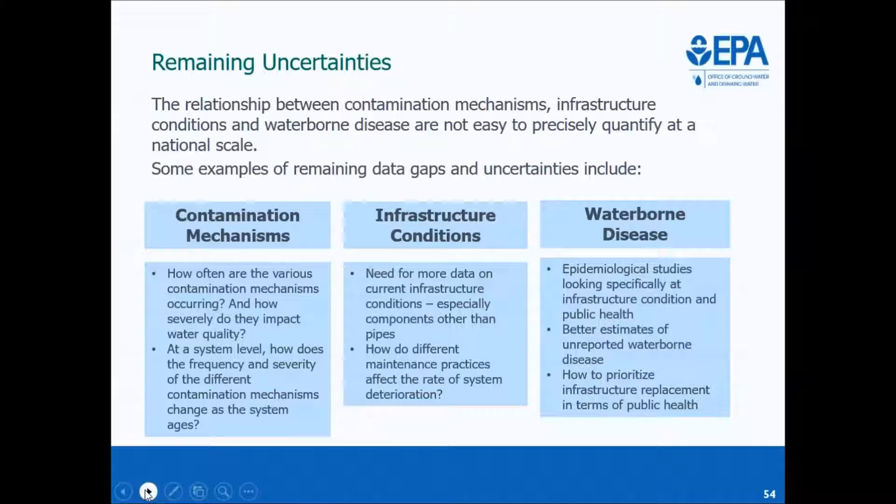So finally, take-home messages here. There's lots of different ways that, if your distribution system is deteriorating, that deterioration could impact public health. We like to think that rehabilitation and replacement of distribution system components can be treated as a public health issue in addition to a system reliability or system efficiency issue. And so sanitary surveys, especially the distribution system part, are one of the tools that can help to identify and correct these infrastructure issues before they become threats to public health.

This is something we hope inspectors are keeping in mind, but also systems being inspected, that these issues, like Lucio was showing pictures of earlier, could have real impacts on the health of your water consumers. And that's it for me.